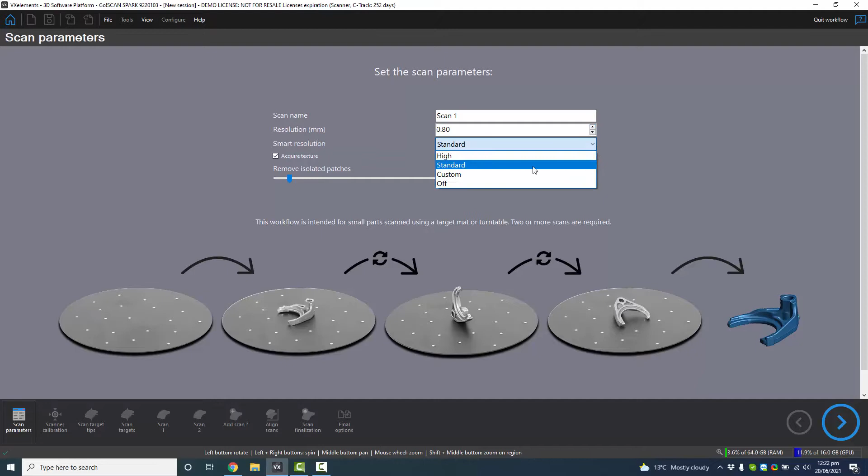And we can choose the resolution, acquire texture, and we now have this new feature called Smart Resolution, which we'll talk about shortly.

So if you need to do a calibration, you can do so, otherwise you can hit next if you've already done it. And the next step is we are going to capture the targets on the table or the turntable.

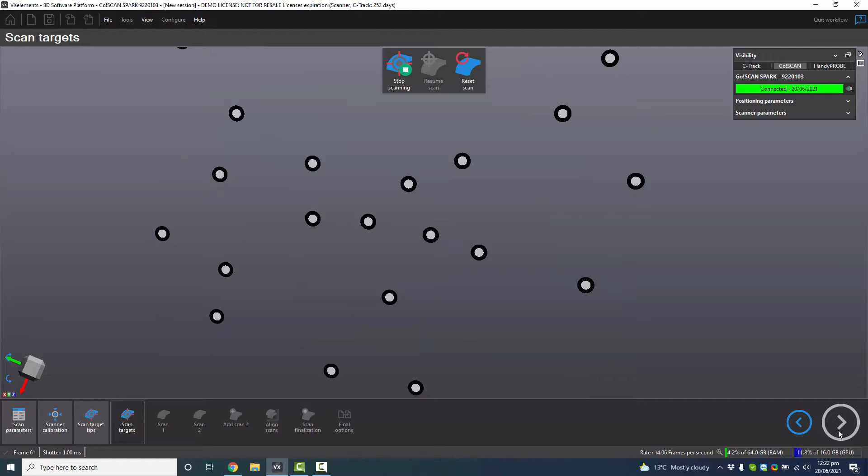It just gives you a few little tips before you start scanning. So you need to tap the button on the side of the Go!SCAN SPARK to collect the targets. It's a very fast process, just to assist with creating a clipping plane. So we can hit stop and then create clipping plane.

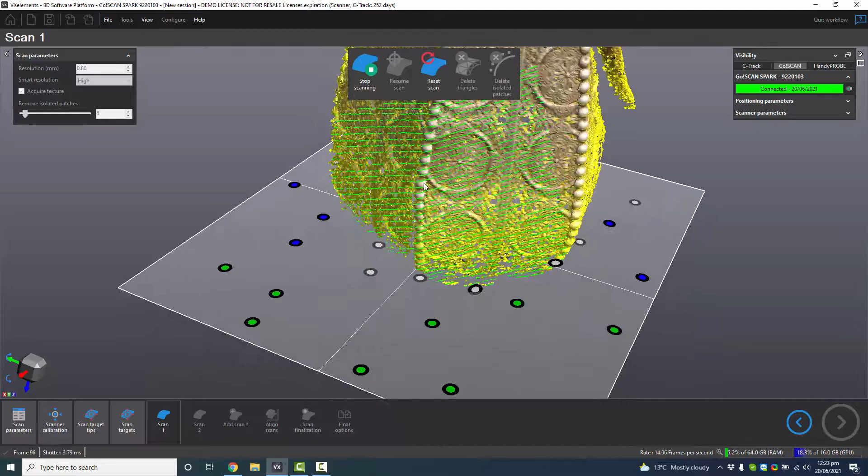It then launches straight into scanning mode, and we can then start scanning the lantern. So now you can see this golden color.

So that is the new smart resolution. So once we've collected enough information in that area, we can then use the hybrid approach of low res and high res.

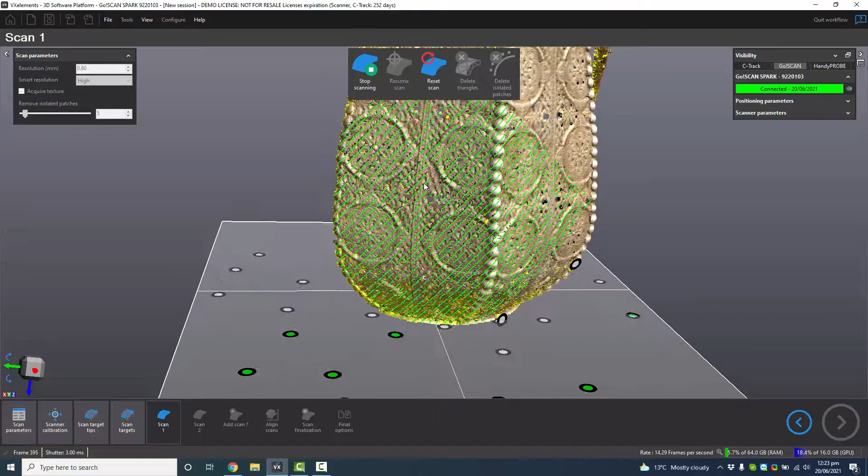So let's say in the middle section you might not need as much resolution, so you'll be quite happy to leave it golden, but on maybe the edges you want to take a bit more time and ensure that there's no gold left to ensure that you've got the highest resolution for your settings.

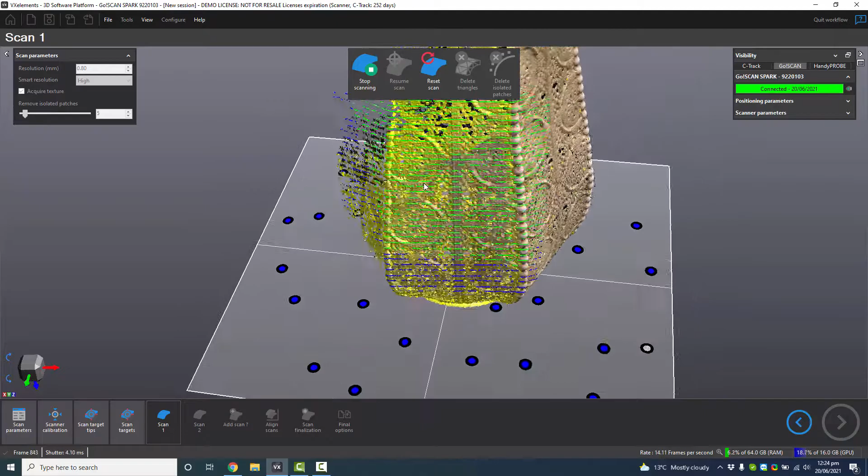So Smart Res is just a very new approach to 3D scanning. It just means that you don't have to scan this object in two separate scans and then try and merge the two together at different resolutions. It's just a hybrid approach. Low res, high res, all in the one scan.

And the great thing about Creaform scanners is that you only ever get a single surface mesh. So we can wave over top of it over and over again, and we'll only have one surface.

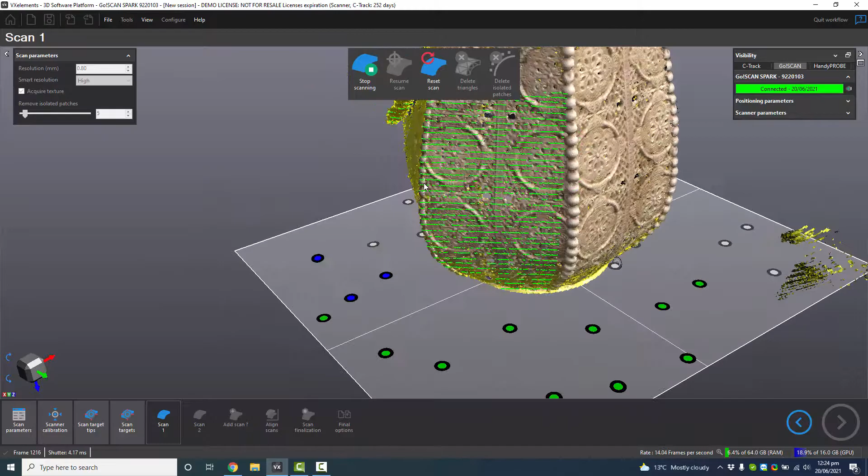You can also see that there's these lines on the part. These are the 99 white lines that get projected onto what you're scanning. And if you're at the right distance, you'll see green; if you're too close or too far, too close is red, too far is blue.

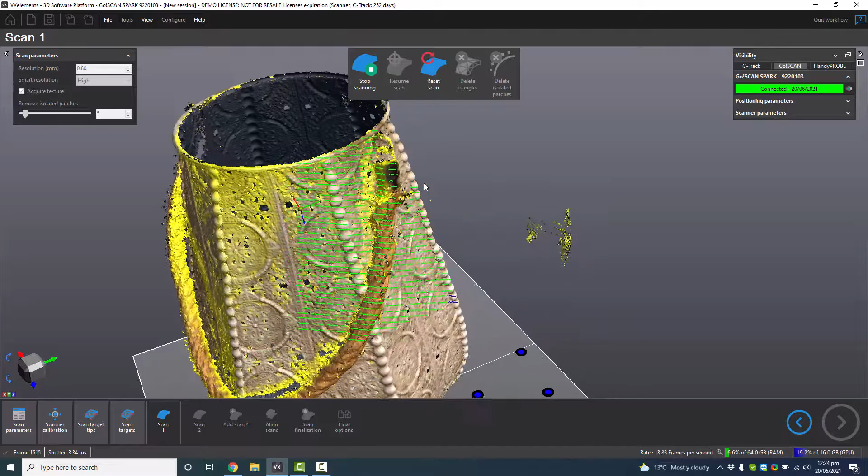So you're obviously looking for the green zone. And I'm just using the turntable to spin my object around so I can stay static, and then just spend the time ensuring that I've got enough resolution on the areas of interest.

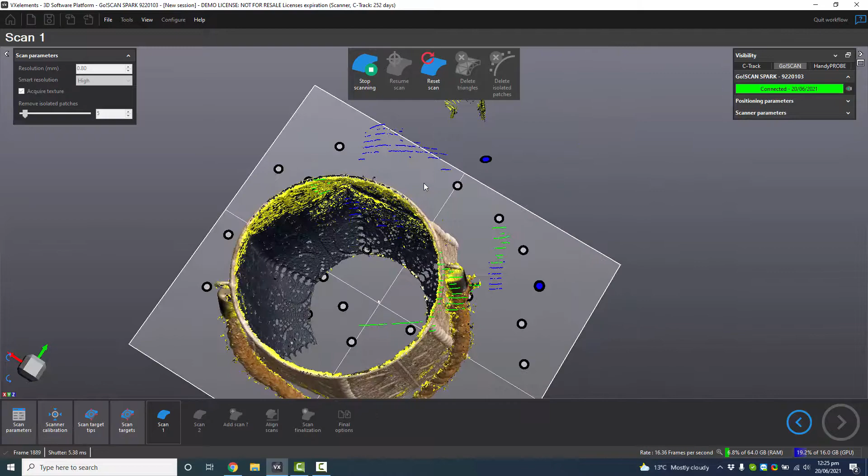So some of the applications you could use this for is heritage and preservation. You could just use it for e-commerce. You could use it for just visualization, sharing what something looks like in 3D. Archiving, if you just want to archive what you have just in case it gets broken. Or obviously reverse engineering is a very important application.

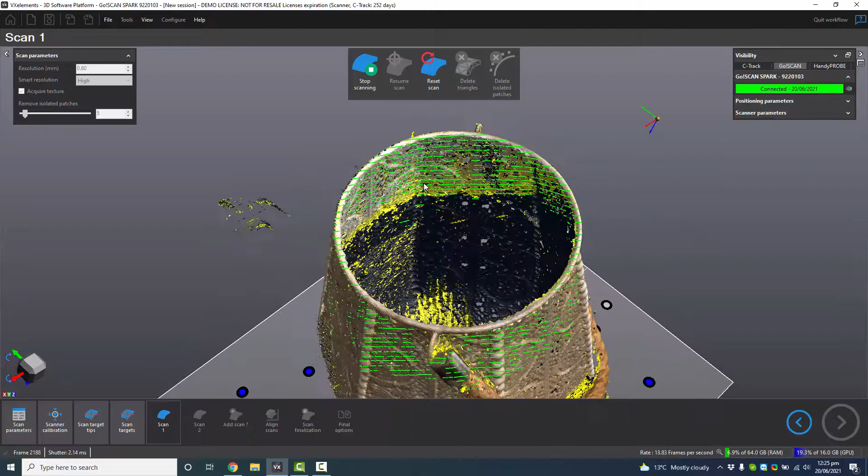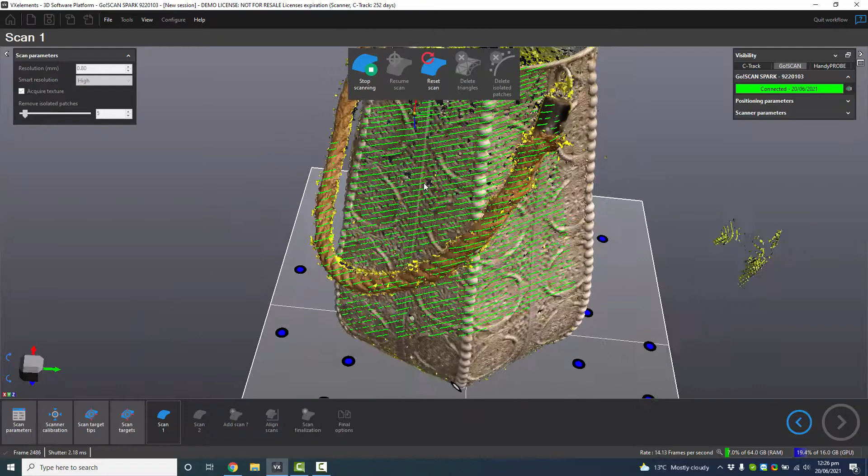So we're just going through and making sure that we've scanned all the right areas. So obviously with any scanner, line of sight is going to be a bit of a challenge, so getting into this part is going to be quite tricky, but for visualization purposes it's all we need.

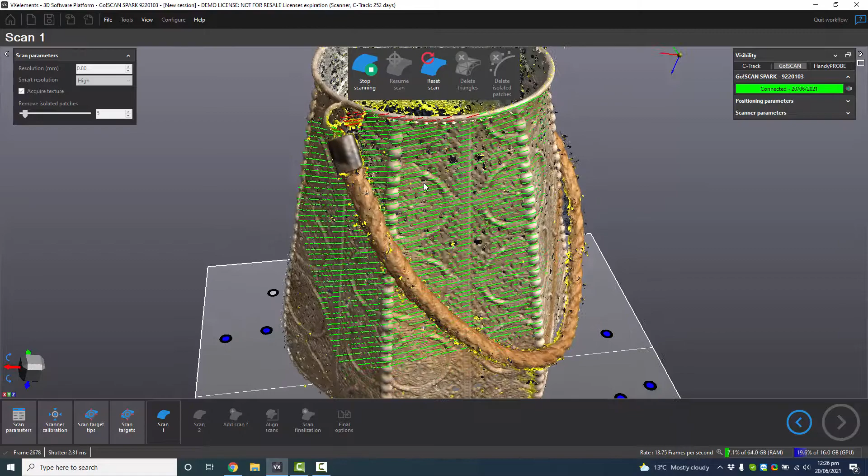So the next step is I'm just actually moving the handle so you can see a part of it up, but what that allows me to do is I can just scan underneath of it and just capture the data below the rope handle. So I'm actually collecting that data below it, and you can see again the rope up.

So I'll stop the scan on that first scan and get a selection tool called the connect tool. Click on what I want to keep, and you can see that other rope hanging above is not going to get connected to it. So I'm going to reverse the selection and delete that.

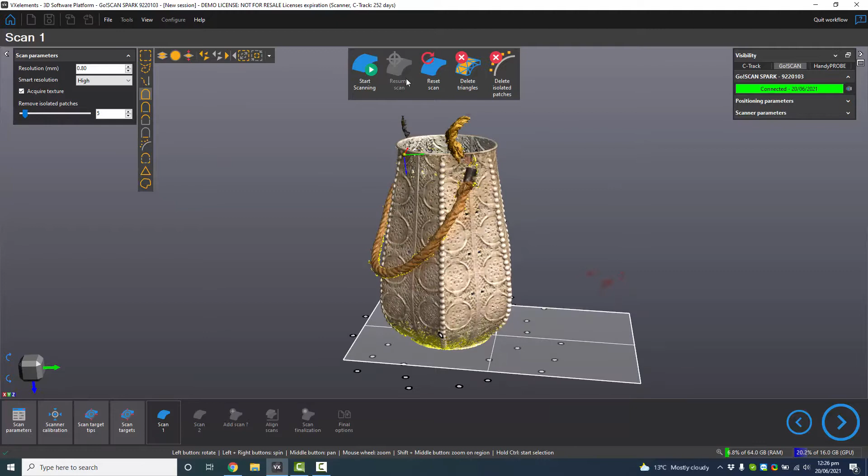And now I can hit next on my scan button down on the bottom right corner, next on the workflow, and we're going to create a new scan.

Okay, so once I've done that, I can now start the second scan, and I've just turned the lantern upside down so that I can collect the bottom of it. Okay, and then just start scanning again.

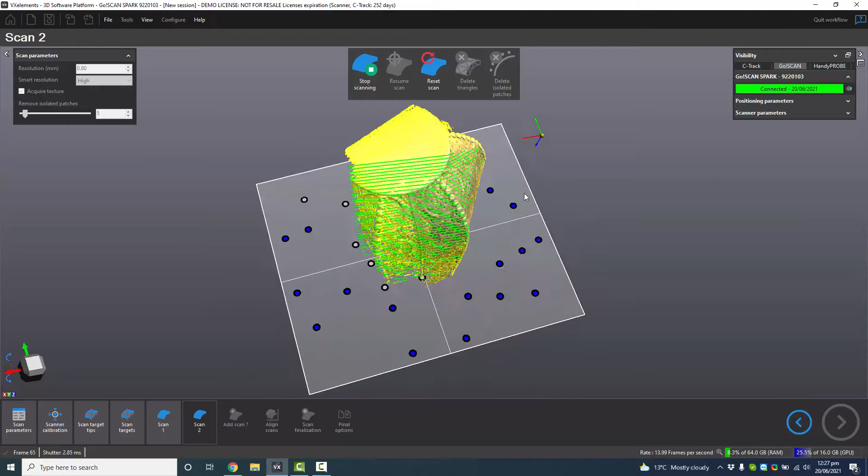So once we've finished collecting all of the data, we need to ensure that we align the two scans together well. Since it's quite a symmetrical object, it may be a little bit challenging, but we'll give it a go.

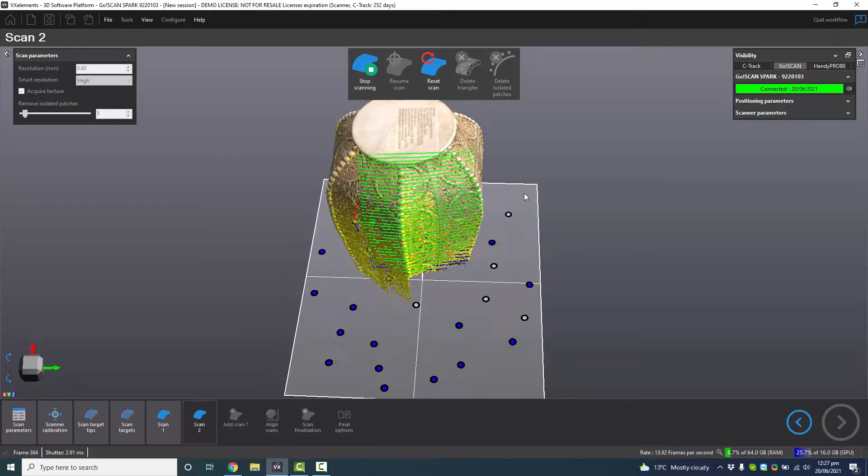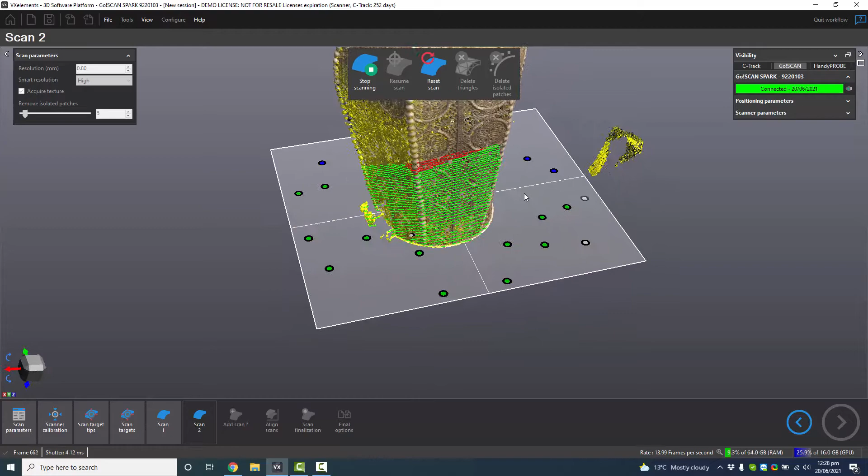So again, I'm just making sure that I've collected the lantern from every angle. I might be collecting the rope, but the goal is I'm just going to carefully not scan too much in that area, because I don't want it to connect too much to the actual main body of the lantern.

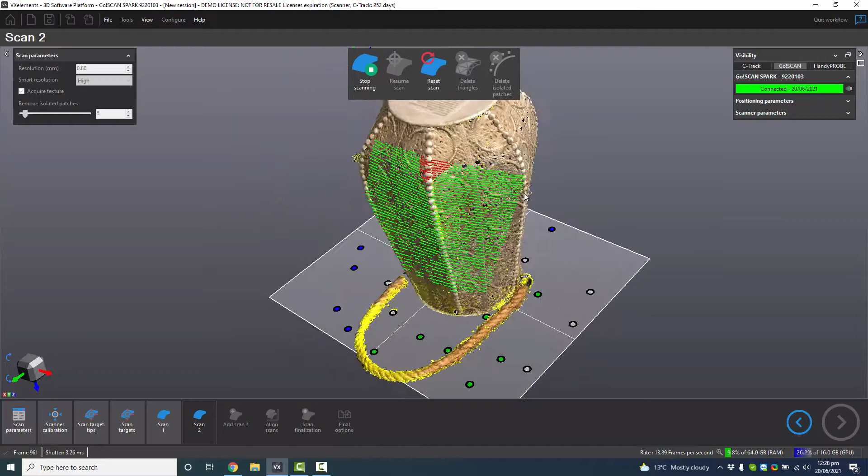So it's only been about 6.5 minutes so far of capturing the data. To 3D model this object, I would not know how long that would take an artist, even a skilled artist - it would be a very time-consuming process. And if it's an artifact, then obviously this is almost the only way to recreate these sorts of things.

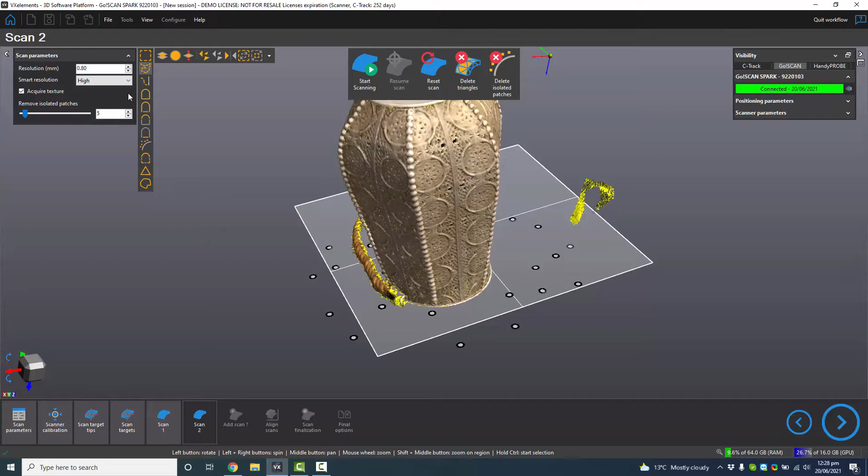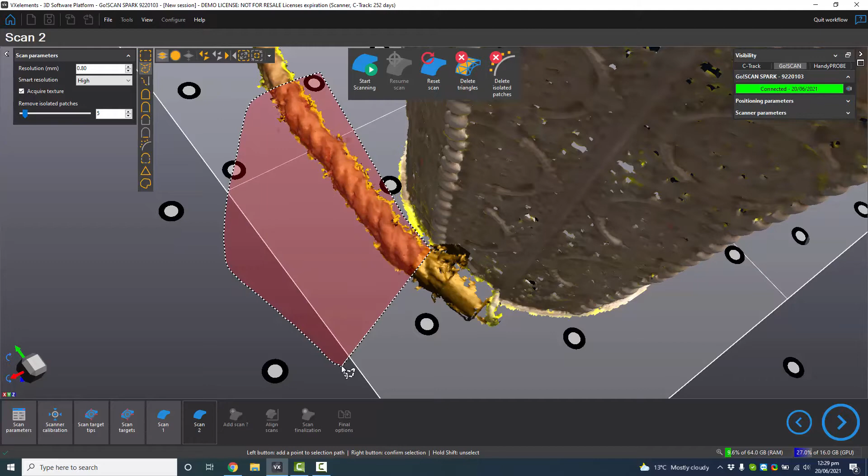So now if I press stop, I get some selection tools again. I can grab a tool called the lasso tool. Make sure select through is on, because I want to ensure that I select the triangles through. And I'm just going to take away some of this area here, because I know I've already captured it from different angles. So we'll just select it and delete that out.

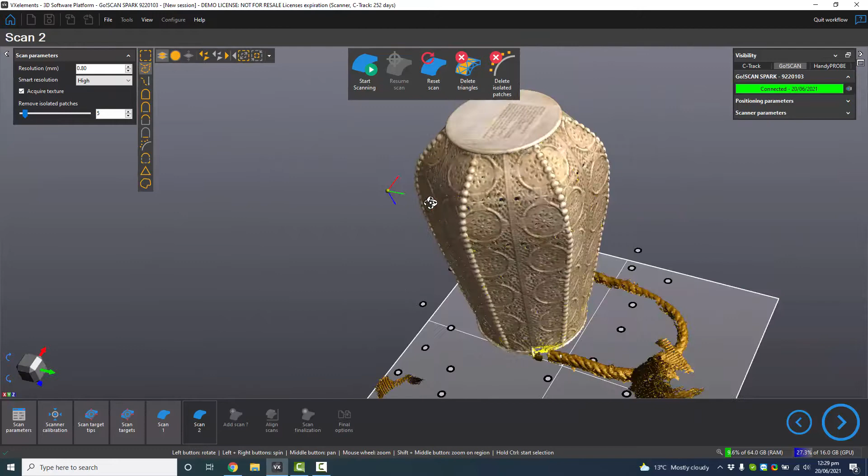And you can see my hand there on the turntable getting collected. Okay, nice little bit to get, and just a little bit on the ring. You can see it's still yellow, so I didn't get very high res in that area, but that's fine - I would have captured it from a different angle. So I can delete what I have selected now, leaving just the lantern.

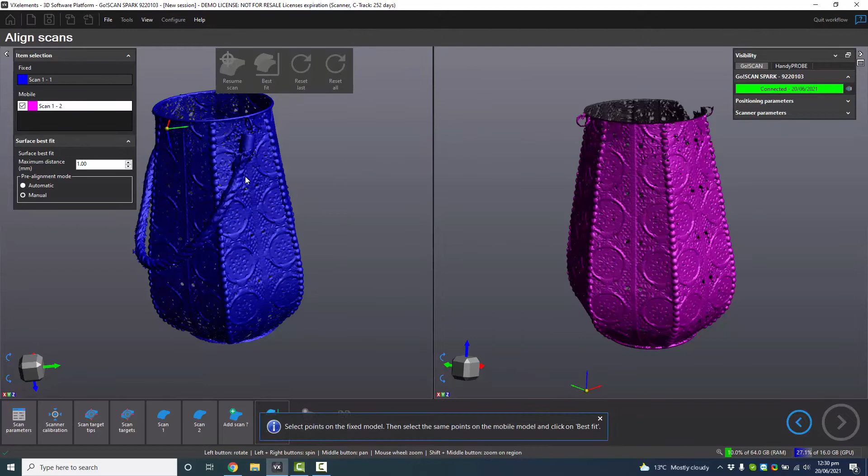Hit next, and now I can either add another scan or merge what I have. So I'm going to try best fit just to see if it recognizes the shape, but you can see it kind of did - it's similar, but obviously from the wrong direction. So we'll reset that best fit, and then we're going to try and align it using some common points that I click onto the actual surface with.

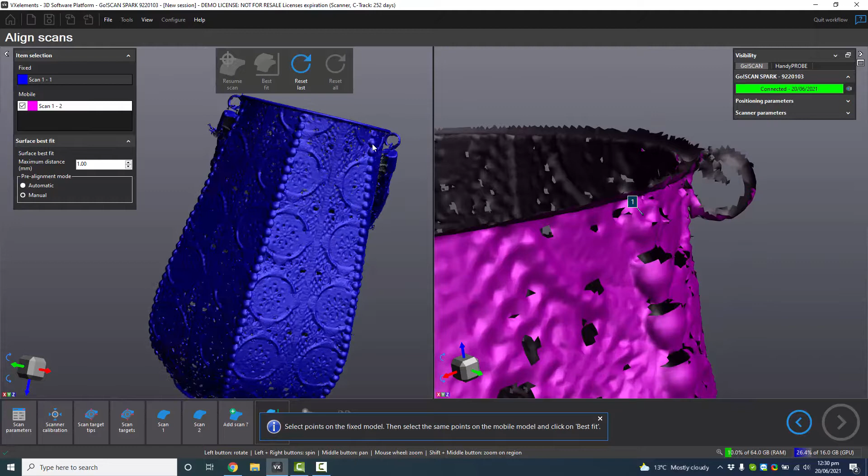So it's hard because everything's kind of the same, so we'll just try and find something that we can use that's common. I think this side looks a bit more common - you're just going to see the point where I think it's common shortly. So I'm going to use this point up here and click my first point, and you only need 3 or 4 common points, and it just needs to be somewhat close enough.

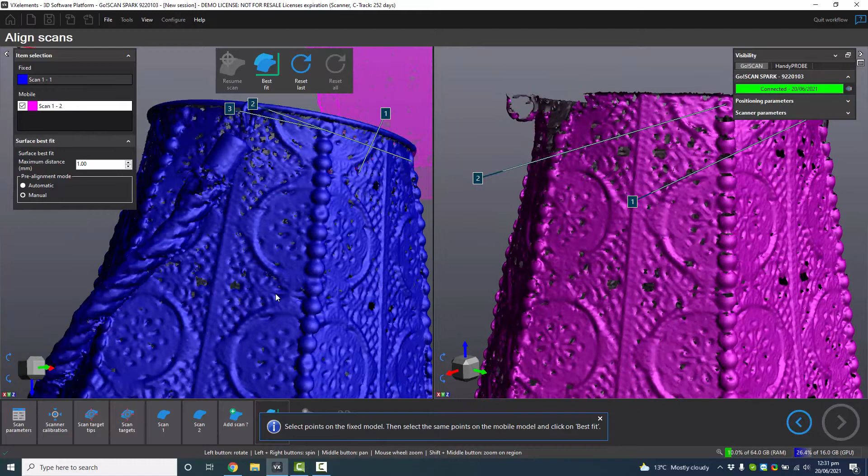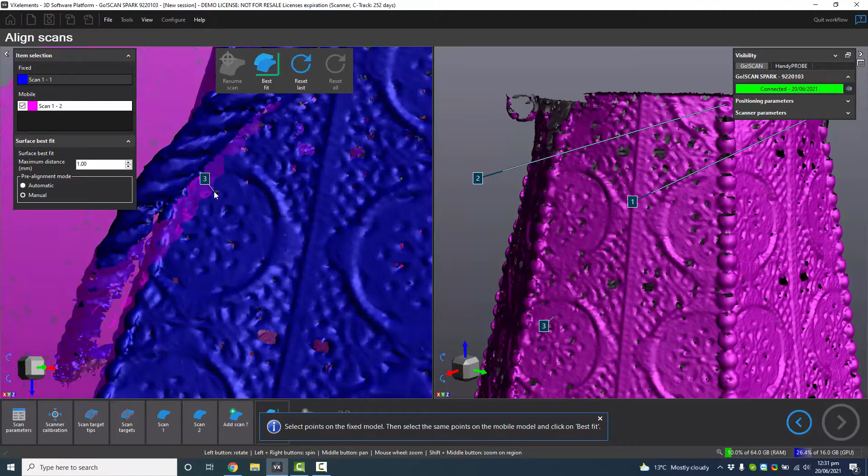So I chose a third point, but it isn't on the other scan, so I'm going to have to find a different point that I can use. I'm going to use my third point there and click it, but actually that says number 4, so I need to go back and delete number 4, then add number 3 again. There we go - just check that out. I may have just got selected through by accident, or chose the wrong point. Yeah, I've chosen the wrong point, so I just need to make sure I get number 3 onto the right point.

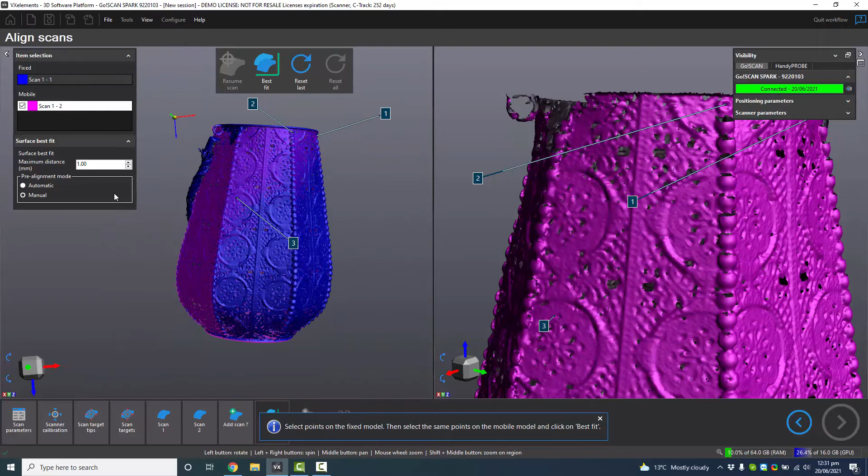There we go. And it just needs to be somewhat close, and then you can best fit, and it will align perfectly. So when I'm happy with that, I can then select Next on the workflow.

It's just now merging the scans together, and it gives you a very detailed preview of how the results turned out. So you can zoom in and have a look. And this isn't even the finalized version yet - this is just a good preview to see if you're happy with the results. And now when you click Next, it's going to go through and finalize the results.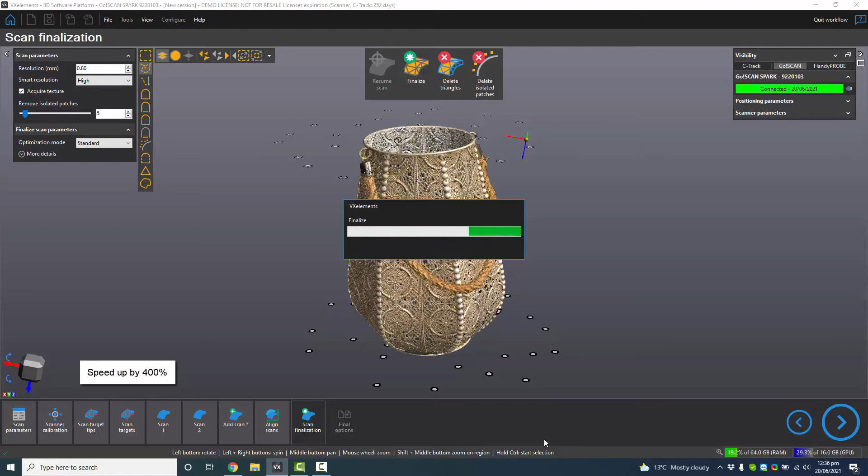So once the finalization has been completed, we can then export a mesh, give it a name, and just save that out.

And once the mesh is saved, we can then exit the workflow and just have a look at the mesh in more detail. So you can see quite clearly that there's a lot of detail there. If I go to triangles and wireframe under display, it's kept very small triangles with the new smart res, so obviously it needed them to show the details that we needed. So yeah, the texture resolution is very good as well - you can clearly read the message on the bottom.